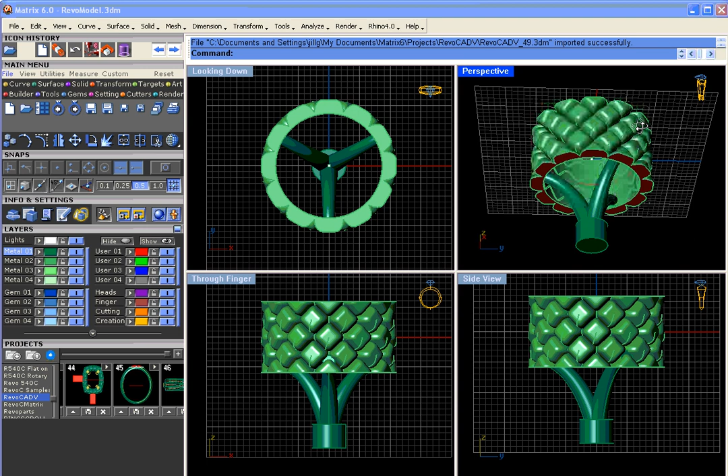Basically, what we have here is a model where the details are all on the outer face of the ring, so you'd want the sprue to go to the inside of the band so that it didn't take away from any of that detail.

So to create the sprue, I'll go ahead and delete this one. To create the sprue, basically all I did was create a curve that I knew extended into the ring. I've got grid snaps off, so make sure it fully penetrates the inside of the band, and then turn grid snaps back on and make sure it comes straight down to the construction plane.

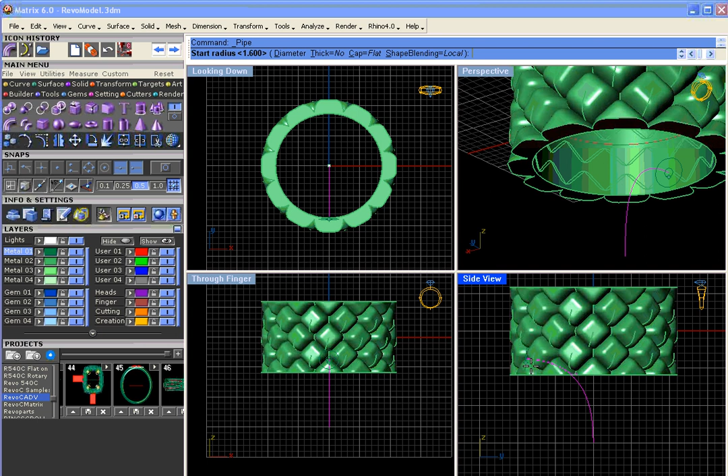Okay, and then we're just going to pipe this. In the solid menu, the button on the first row, second button, is pipe. We'll click on pipe, and it's going to ask us for a start radius. Remember, that is the radius, so whatever number we choose here is going to double, or we could just toggle to the diameter function and work in diameter. Either way, whichever you're more comfortable with.

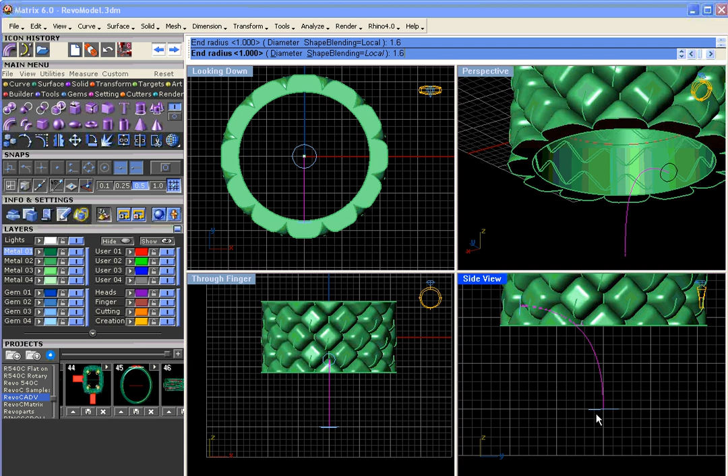So for the start radius, I wanted it to be about 2 millimeters, so we'll have a radius of 1. And the end radius, I want it to end about 3.2, so we're going to change this to 1.6, half of 3.2. Then press enter to end the command, and that gives us our first gate.

Now we can take this and polar array our gate. In the transform menu, polar array - you're going to want a polar array.

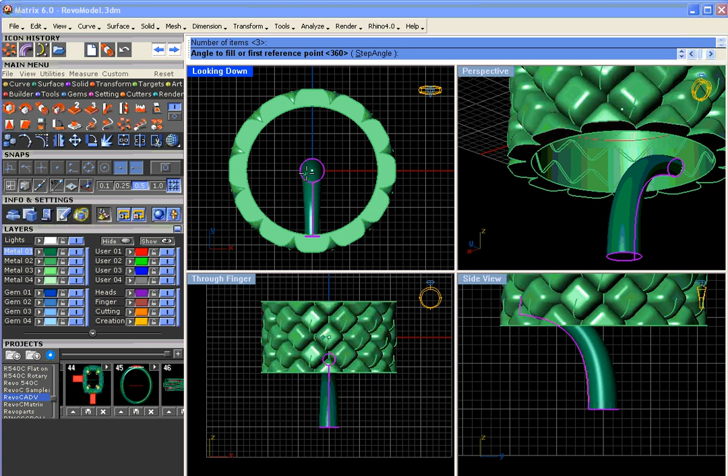Polar array is a viewport specific tool, so we need to make sure we're in the viewport. We want to array around a point in space. Select the object to array - that's going to be our gate. Press enter. The center of polar array is going to be F4, and I want 3 items filling 360 degrees.

And that's what this looks like. So that looks pretty good. I might want to pull it out of the ring a little bit, so I'll just back it down.

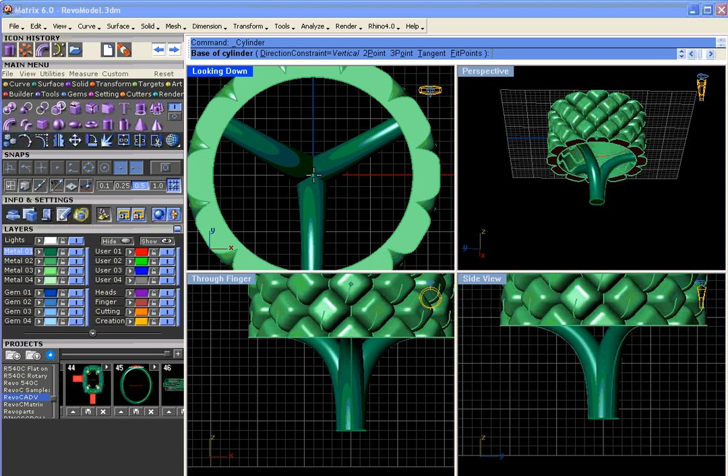And then last but not least, we want to add a support. And the support we could just use - let's use cylinder, and we'll start the cylinder at F4. Remember that our sprue at the widest point is 3.2 millimeters, so if we wanted to just extend that, we could go 3.2, and we'll make it about 4 millimeters tall.

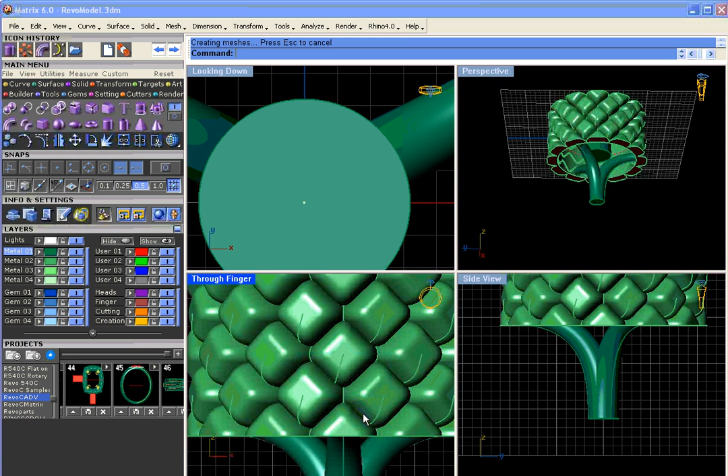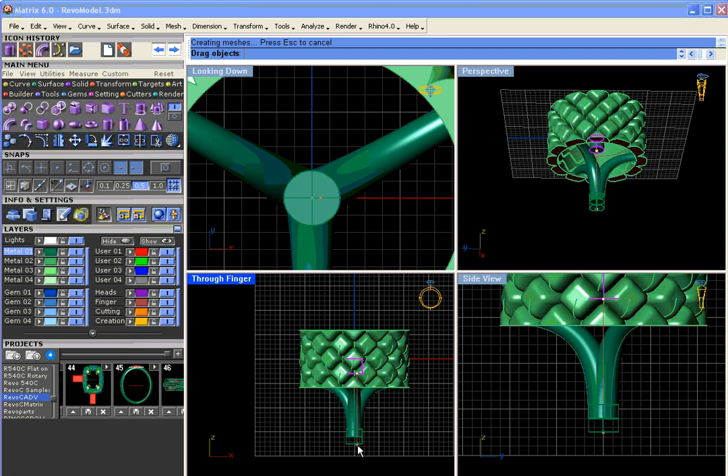It's real important - oh, I was working in diameter there, let's do that again. Base of cylinder, F4, the radius 1.6. It's real important for your support that you make it at least 2 millimeters tall, and we'll talk about that a little later on.

So we're just extending that sprue out ever so slightly. It needs to be, again, at least 2 millimeters beyond the model.

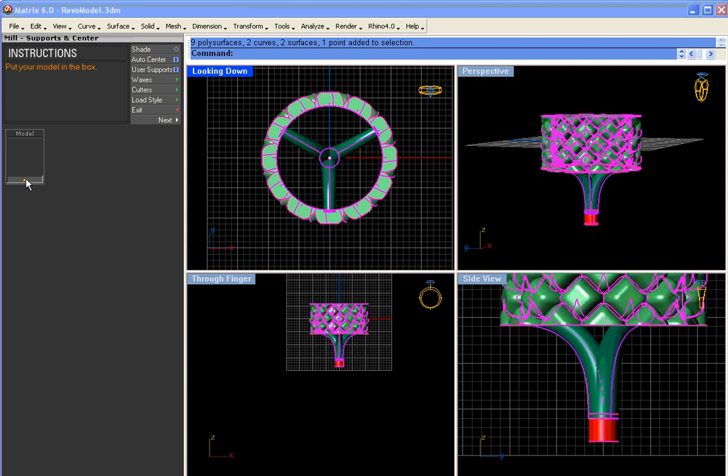Place the model in the model window, and you'll notice that it picked up that it's a ring model. Well, the orientation of the model is important for this case because we're actually going to tell it it's a non-ring model to access some of the other strategies.

So toggle on non-ring model, which is going to give us a different set of strategies to choose from. And you need to make sure the orientation of the model is a little different than you normally work. Typically, through the finger viewport, you'd see your ring rail straight through.

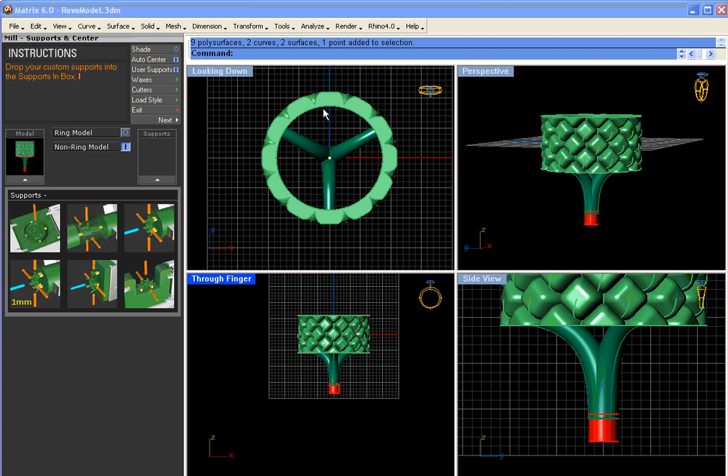Well, I've rotated the model 90 degrees in the side viewport to make sure it's up and down, and that we're seeing the ring rail in the looking-down viewport. And there's the ring rail there, so you can see it straight down here.

We're going to be choosing the support and inputting it in the support window, and choosing the 3-jaw chuck, 1 millimeter at a time.

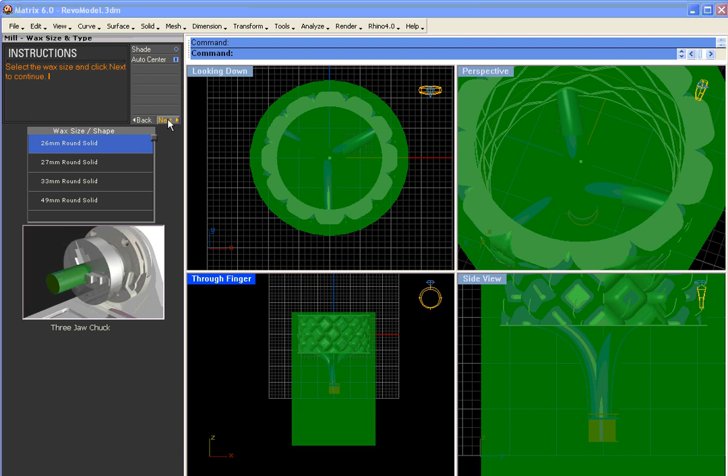Click Next. The software is suggesting that we use a 26 millimeter round solid tube. We have that, so we'll go ahead and click Next.

And we're going to be choosing the 8 sides for this design. Clearly, we're going to need more than 4 to complete all of the detail on this piece.

Click Next. On this page, you would choose the distance between toolpath that you would like to work in, and click Next.

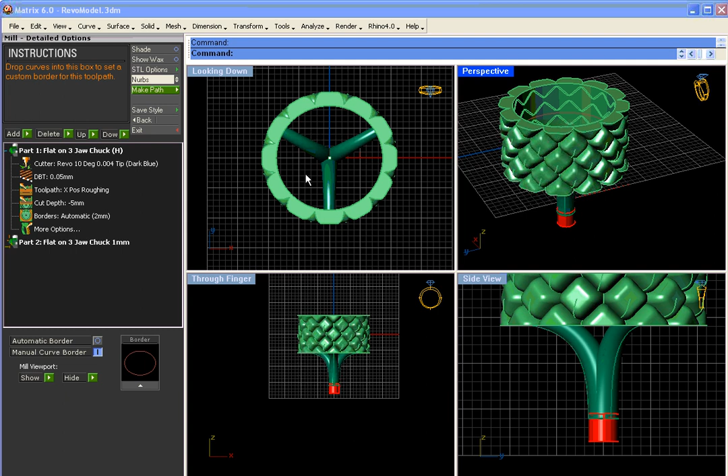Okay, for part 1, the flat-on 3-jaw chuck, double click that to expand your options. We're going to put in a border, and we're going to use a manual border, using our ring rail as our border curve.

Let's go ahead and look at the cut depth. You can see it's not coming down far enough to fully clean up the inside of the sprue. So click Go and move that down. Press Enter to end the command.

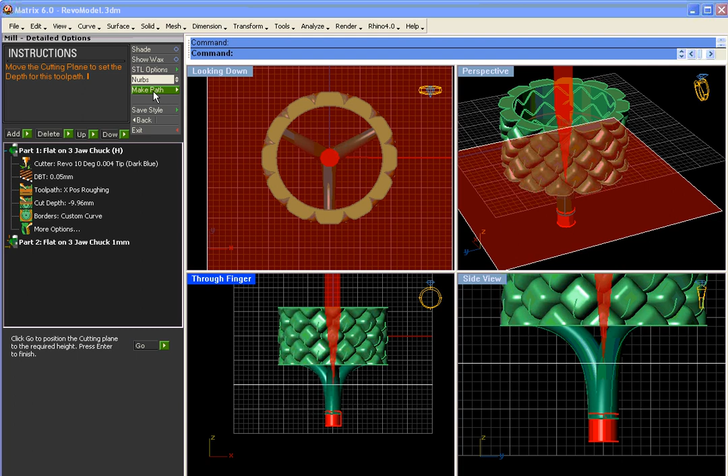Let's just go ahead and make our paths to see what that does. Okay, let's take a look at our tool paths.

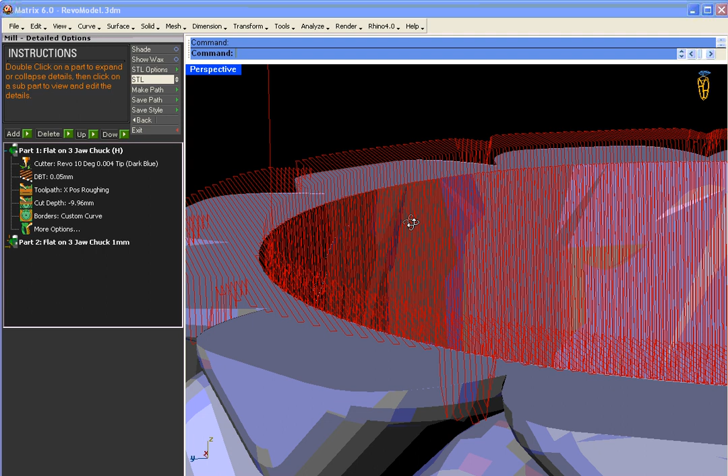You can see the first path, there's a little bit of a roughing pass that happens initially. It goes down and mills part way down, then mills the full way down after it's roughed out the initial wax. If you want to see, remember earlier in the video series we talked about changing the cutter definition to extend the pass depth. If you're unclear on the technique here, you can refer back to the video on milling a head in the center of a ring rail.

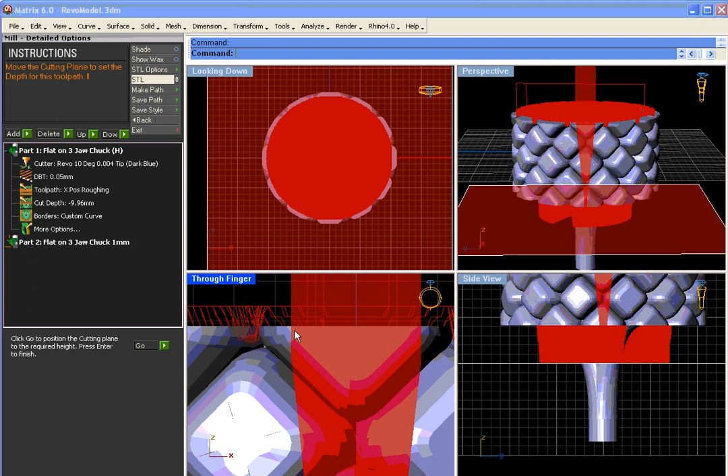But let's go ahead and look at the cut depth again. You can see if we went the full distance of that pass, you're going to bury the cutter. So it's really not a good idea to go anywhere beyond 14 millimeters on that cutter, and we're just delving 14 millimeters deep. So a roughing pass is probably a good idea there, so I'm not going to edit the cutter in any way.

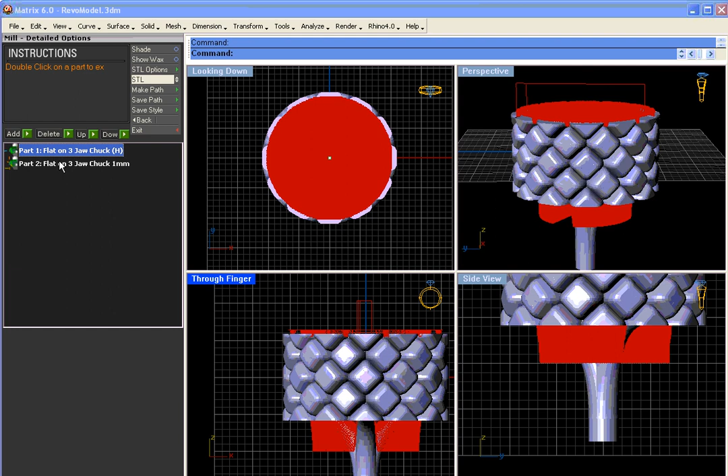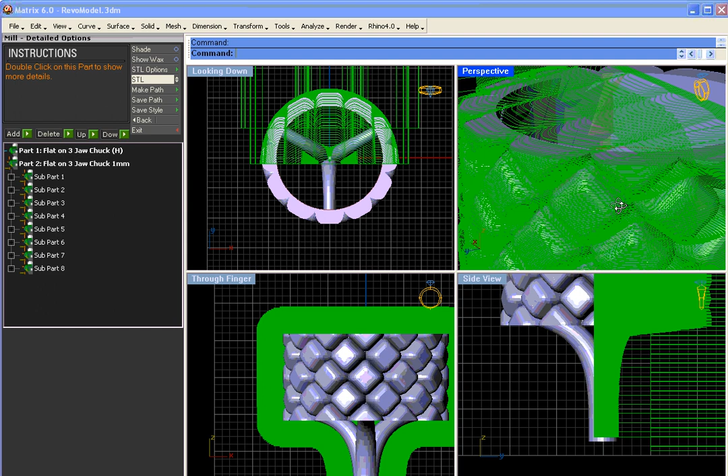And then the last 8 passes mill the project 1 millimeter at a time. And see, these have roughing passes as well. It mills 1 millimeter at a time, rotates 45 degrees, mills from the other side, so that as it's milling down, it's keeping the rigidity.

So this is completely rigid until it gets down to about here, and then it's starting to become more flexible, but it's still milling 1 millimeter at a time, so that you can avoid any chatter that may occur if you were to try to mill this all in one pass, like on a rotary axis.

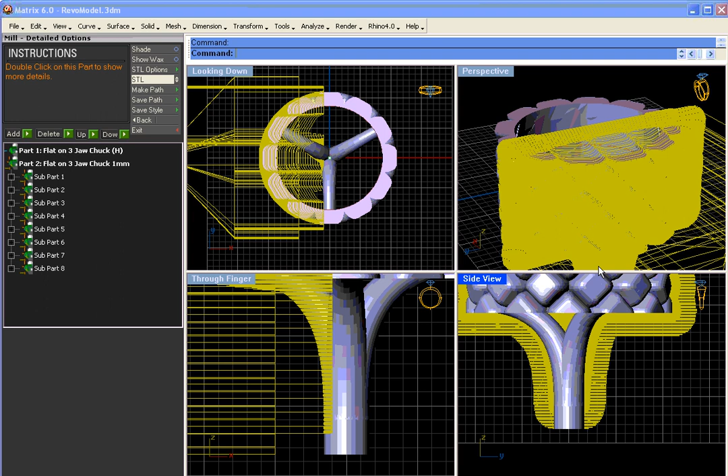The other thing to keep in mind is that if you look, that support is actually not milling through the support. So everything looks good here on this pass.

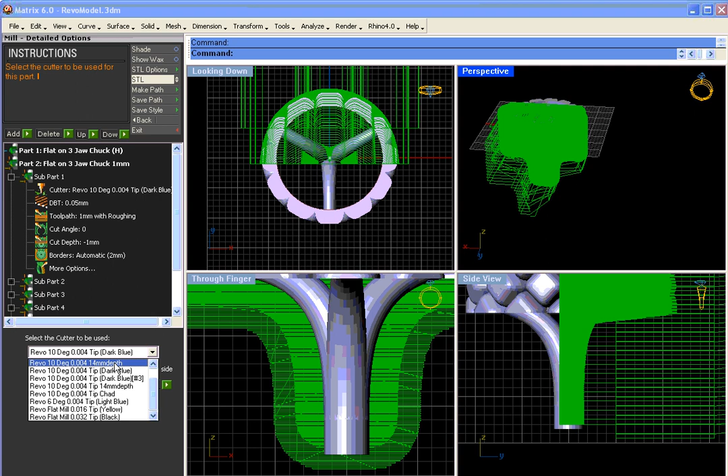This roughing pass, we could look at seeing how deep we'd get if we were to change the cutter. So let's just peek at what it would do if we went the 14 millimeter depth and set that cutter, and make our paths and take a look and see if it avoids that roughing, or if it eliminates that roughing pass. So let's take a look at our paths.

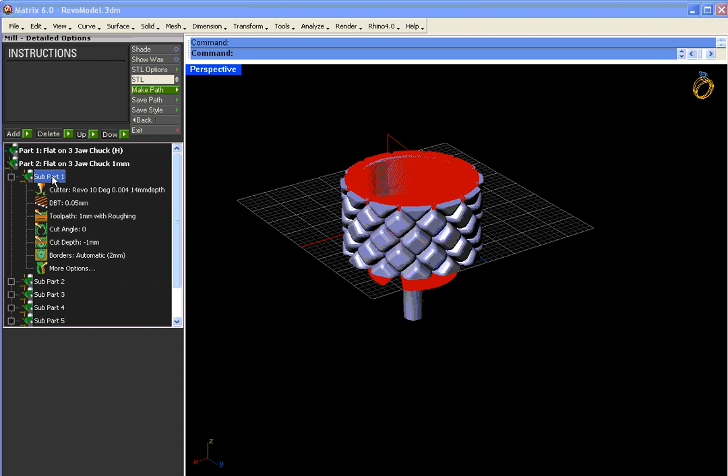Actually, in particular, that first path. And you can see that it added a roughing pass in anyway. So even changing to the greatest depth that we can delve into the wax, the 14 millimeter, did not affect the time in a positive way. It still inserted a roughing pass.

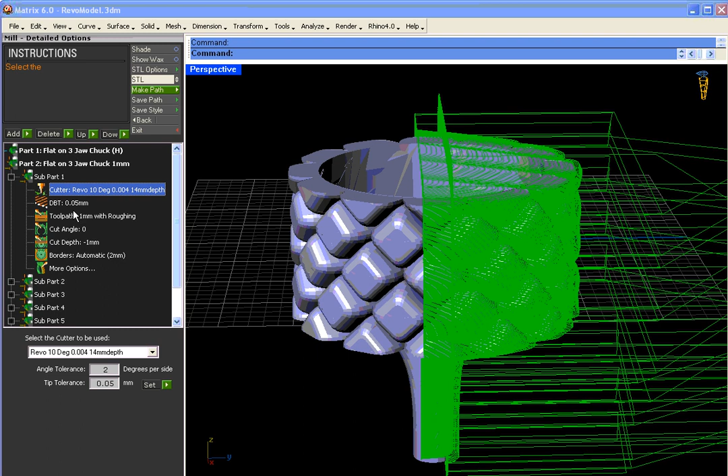So I'm going to go ahead and change that back to our standard 10-degree cutter and make paths again. There's no way to avoid that extra time, so it's better just to be safe and let it do its automated roughing passes 10 millimeters into the wax. If you're unclear on any of these techniques, again refer to the video on milling a head in the inside of a ring rail.

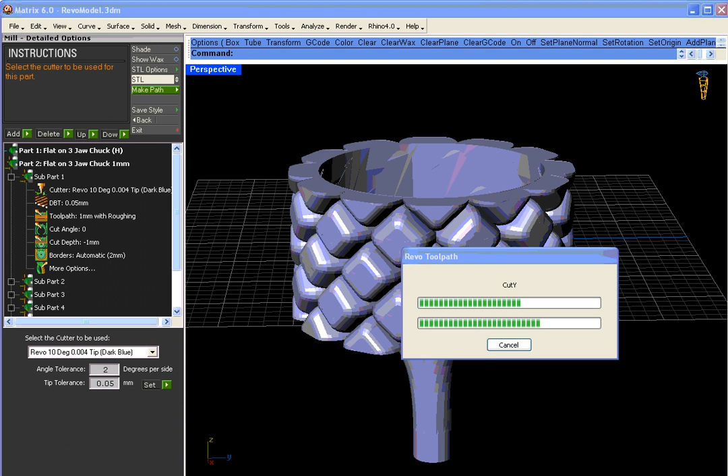So again, we'll just peek through the paths to make sure everything looks right. The first one is the top down cut. That looks great. The next subpart, again, verifying that it's seeing that support.

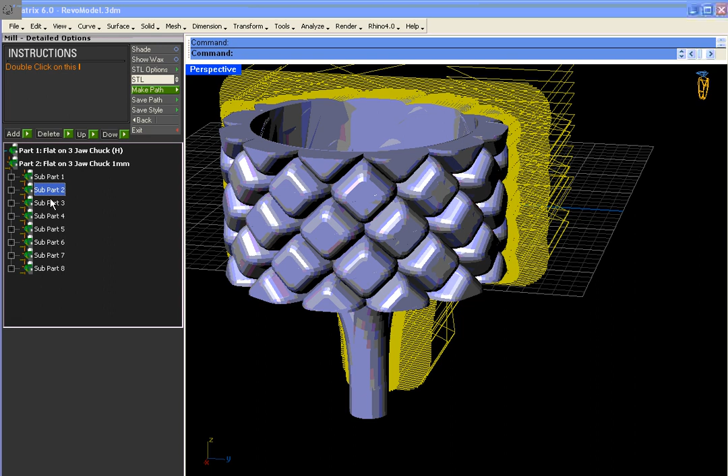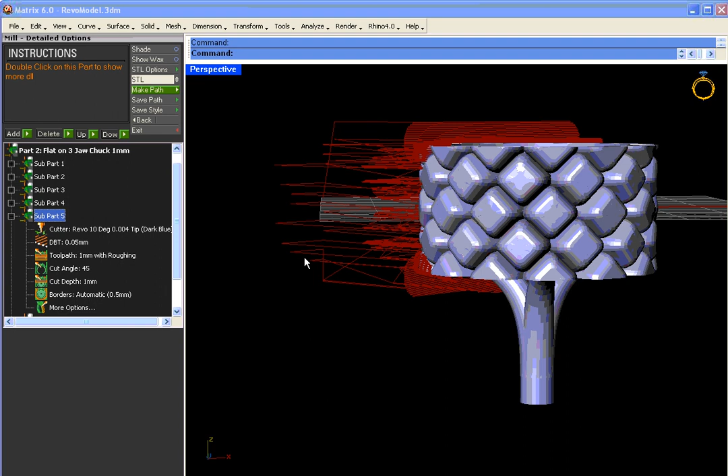This is exactly what I'm expecting to see. We've got the cut new only, so it's only milling the parts that haven't been reached on other passes, because in the more options, the cut new only is in effect on the last 4 cuts.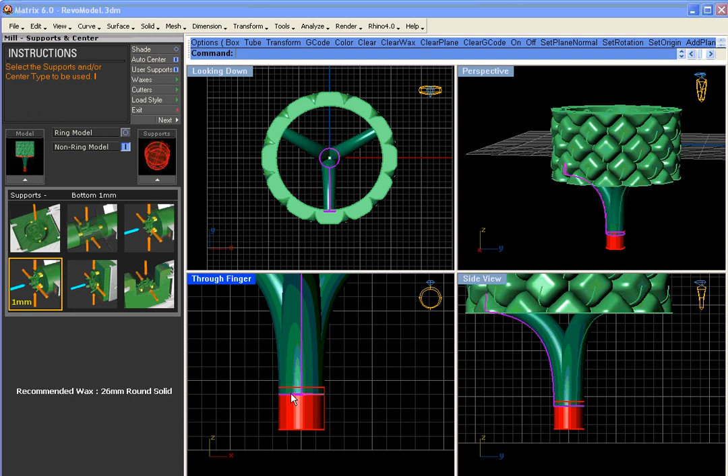So in the event, I'm just going to back up in the software here. In the event the support that you created does not extend more than 2 millimeters off of the actual geometry, the support isn't going to be long enough to overlap the border. It's important that every single support is at least 2 millimeters greater than the geometry, so that the border that's created intersects with the support. For example, if we go 2 millimeters beyond the geometry in any given portion.

Or at any given point around the ring's geometry.

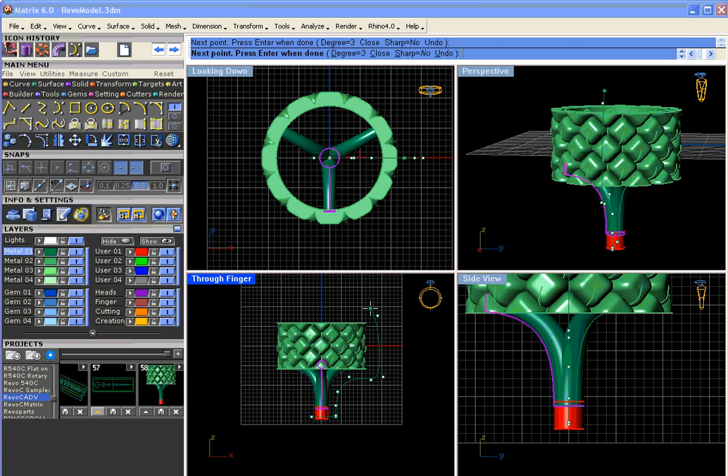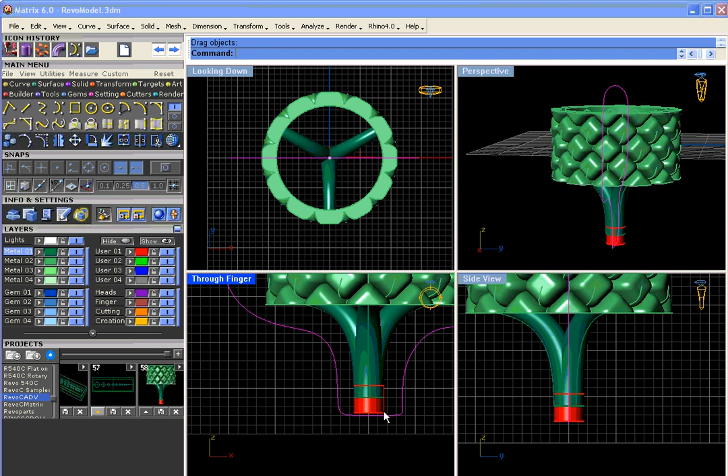If this was actually 2 millimeters offset, you'd see why it's important that the support extend 2 millimeters beyond. If it doesn't, say the support is tucked up into the geometry, the support may be 4 millimeters, but it's not 4 millimeters offset from the project.

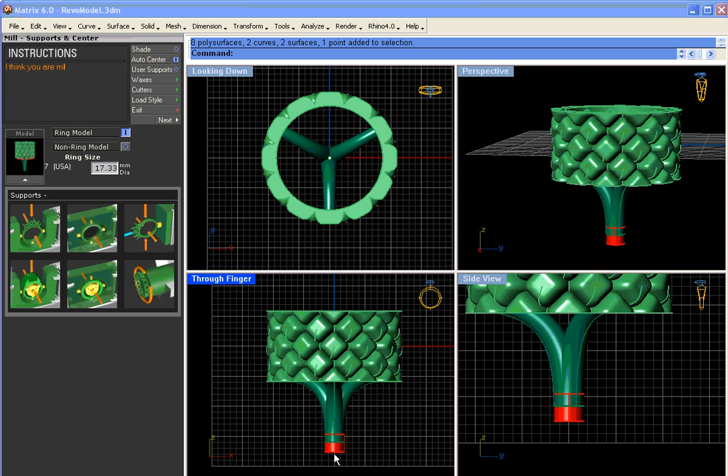When the custom border is automated, it's no longer going to intersect with that support. So you'll end up having this milled completely off and fall off the mill in the middle of the milling process. For example purposes, we'll go ahead and take it through the software so you can see exactly what I'm talking about in the toolpath generation, and we'll make paths. Let's go ahead and take a look at some of these cuts.

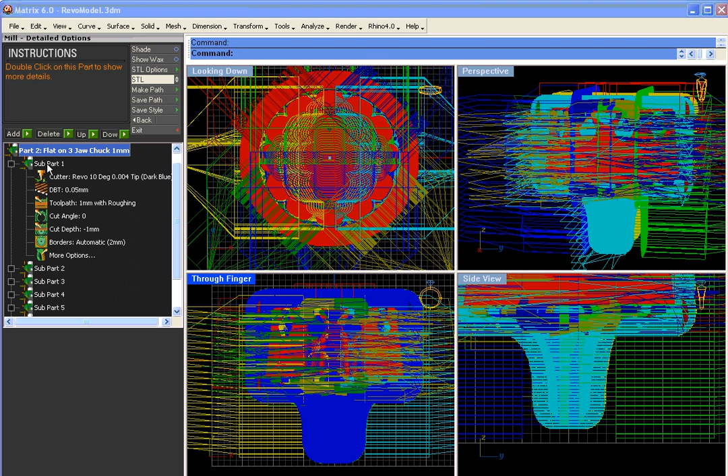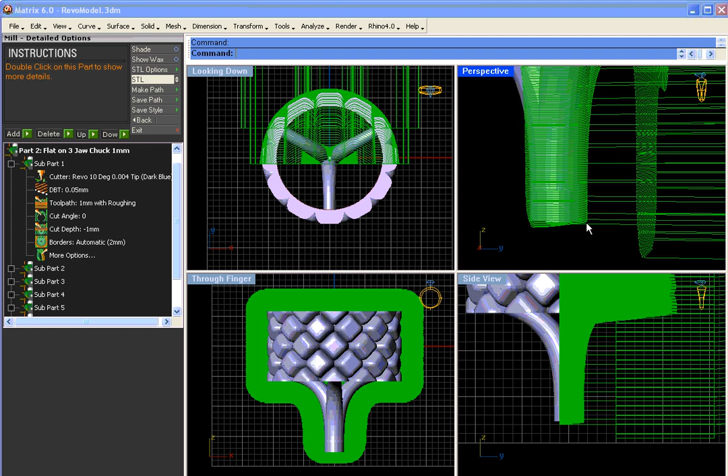See how the toolpath, the support was not extended far enough, and the custom border that it automates in the software is 2 millimeters beyond the geometry. So it's actually cutting the entire model off. That support is not acting as a support.

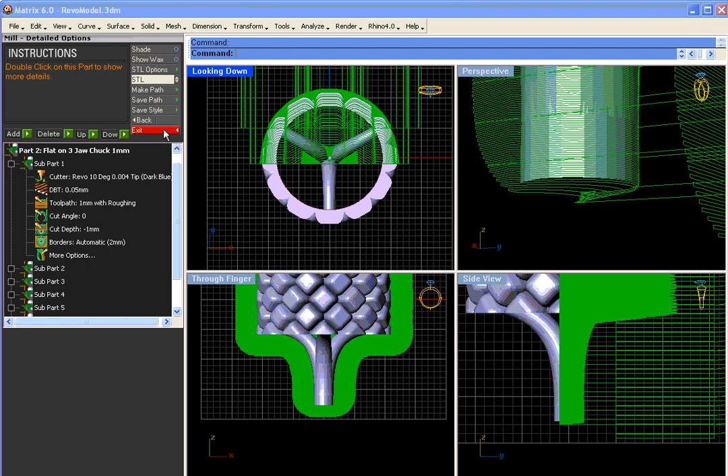Along this same concept, let's look at another project real quick that I think will drive this concept home.

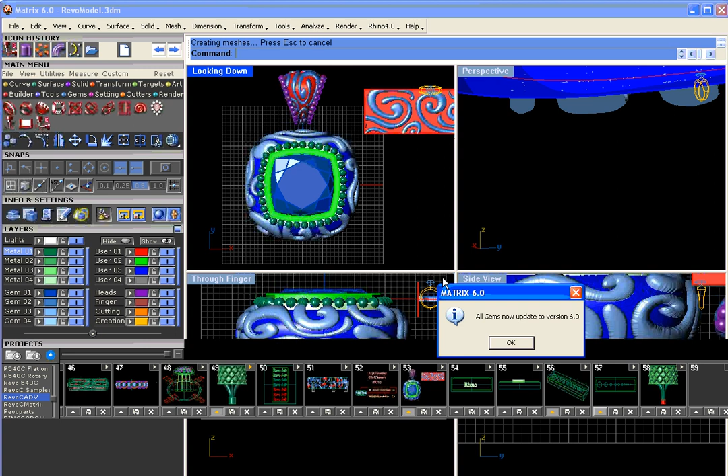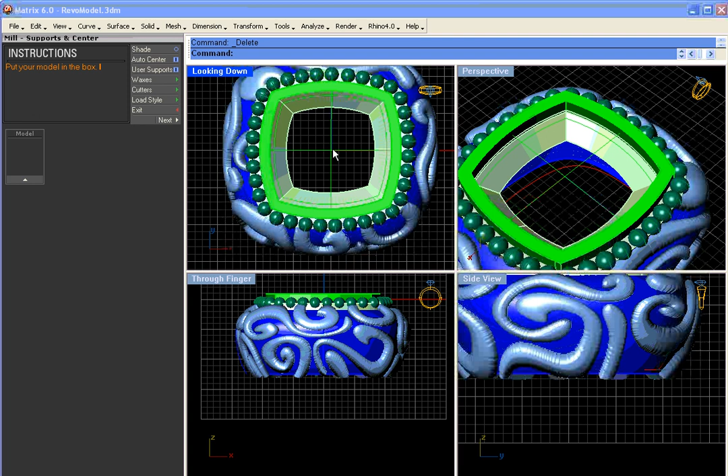This is an older model, but we'll just get rid of the gem, get rid of some of this stuff. And if we wanted to mill, say, this top portion, same strategy we just used for milling the sprue, except there's no geometry down here that we're trying to mill. You don't see the sprue down below the inside of the bezel, this is just empty space. So let's throw the model in the model window.

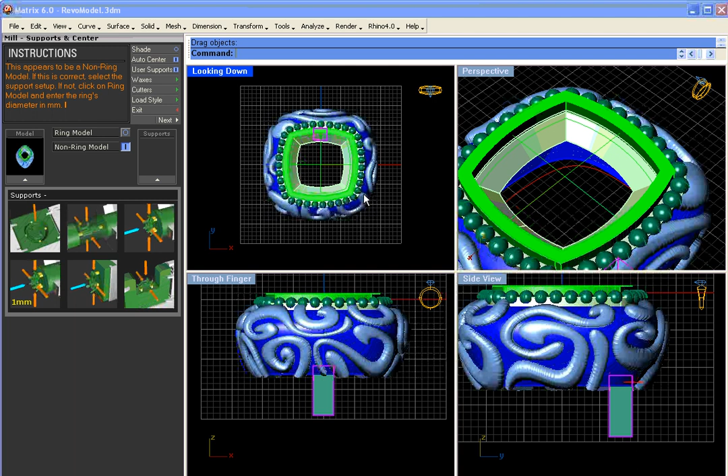It's a non-ring model. We'll create a support, or a couple of supports, and we'll just polar array these.

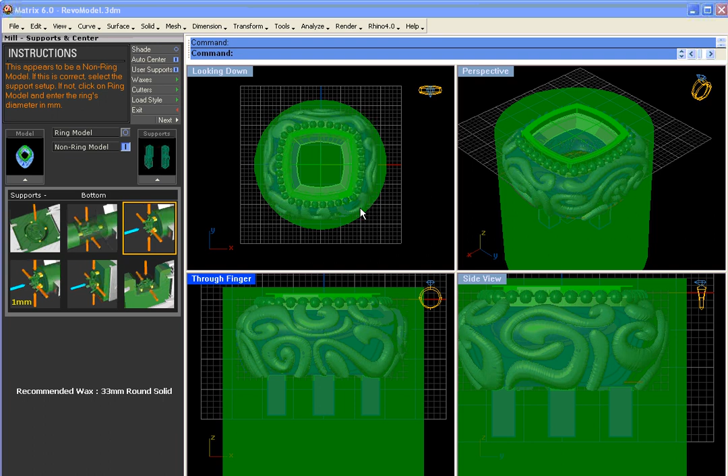Throw the supports in the support window, and we're going to choose the 1 millimeter at a time option so that it keeps the rigidity. It mills 1 millimeter, rotates 90 degrees, mills the other side, rotates again, or 45 degrees if you've got a lot of details out at this corner. Since we do have a lot of details, instead of rotating 90, we're going to choose the 8 options and rotate 45 degrees in between each step.

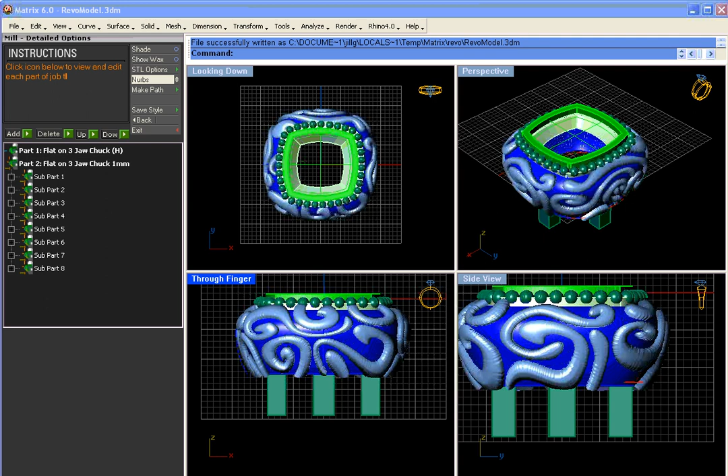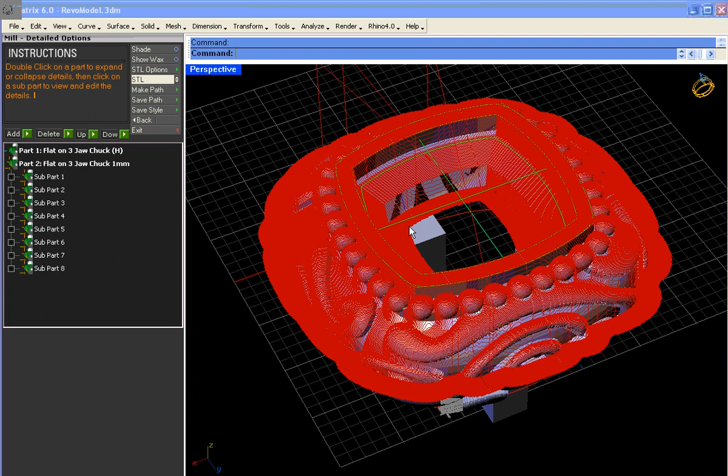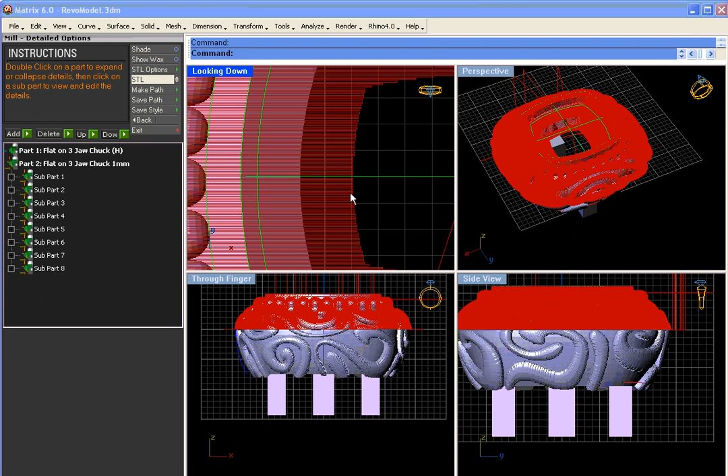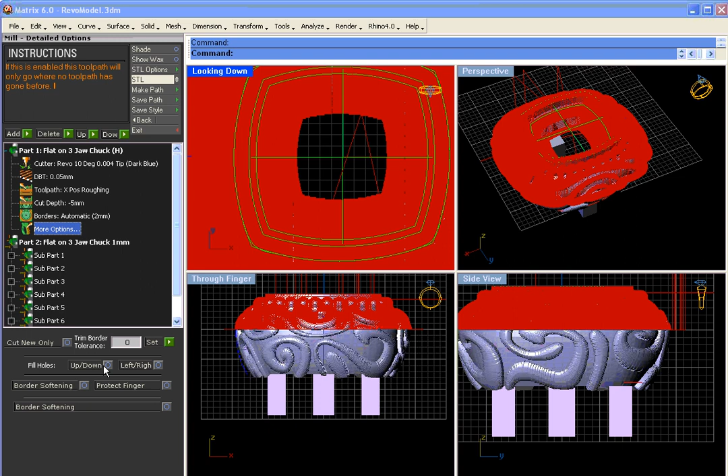The reason for that is because of those automatic borders. It saw the geometry, offset the geometry by 2 millimeters on each side, and it mills only in between there, so it doesn't waste your time milling stuff where there's no geometry. So in this case, maybe I want it to mill this empty space, remove that wax. There's an option within the advanced or more options section called fill holes.

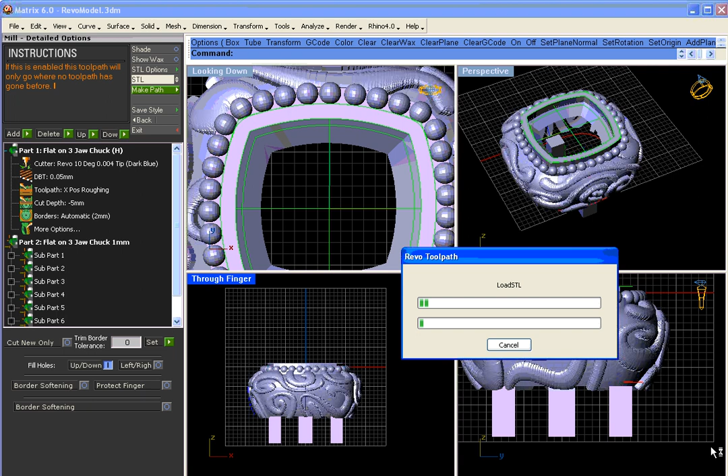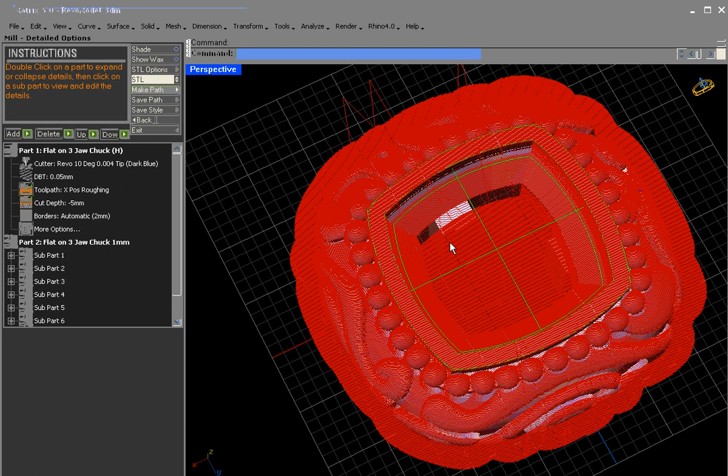Any hole anywhere where it would automatic borders and put a hole in the geometry, it's going to fill. This is in the up and down path, so we're going to choose the up and down option and go ahead and hit make paths again and take a look at the difference in what that looks like. Now if we examine the toolpath after changing the fill hole option, you can see that it filled the holes with toolpath. So it didn't see anything that it saw as a void or empty space, it filled it up, and it actually mills in that area now. So that's what we want to see.

So that's a little bit more about the way borders work and the fill holes option under more options. The reason why we didn't have to use fill holes when creating the sprue was it saw the sprue geometry down here as part of the model, so it knew it needed to mill that geometry, so it didn't make empty cavities in there. That will conclude the creating a sprue in the model video and understanding a little more about fill holes and the way borders or automatic borders work.